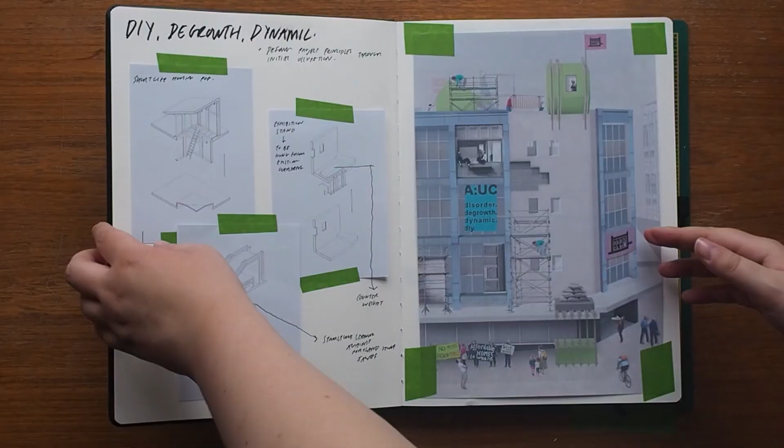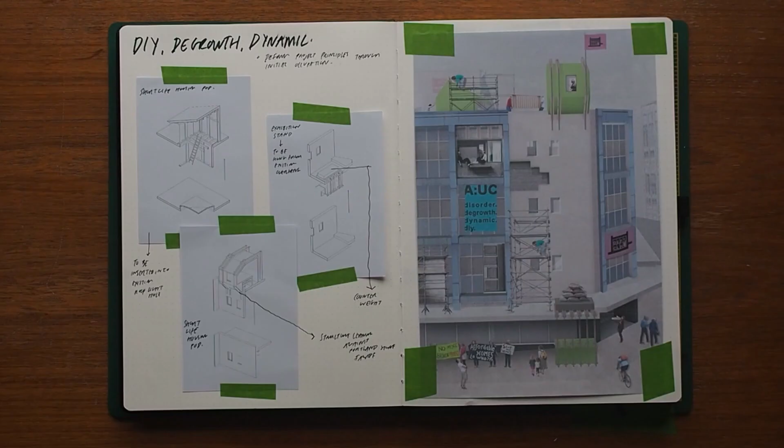The collective's approach is guided by three core principles: degrowth, developing an architectural language and spatial programme that changes systemic attitudes towards consumption; DIY, creating architecture that supports breaking, editing and altering, allowing for user-led customisation; and dynamic, designing spaces that are non-determinative and responsive to evolving user needs.

Evolving from early short-life housing projects, an alternative housing manifesto is proposed. The manifesto capitalises on the moratorium context by using abandoned construction sites as material stockpiles.

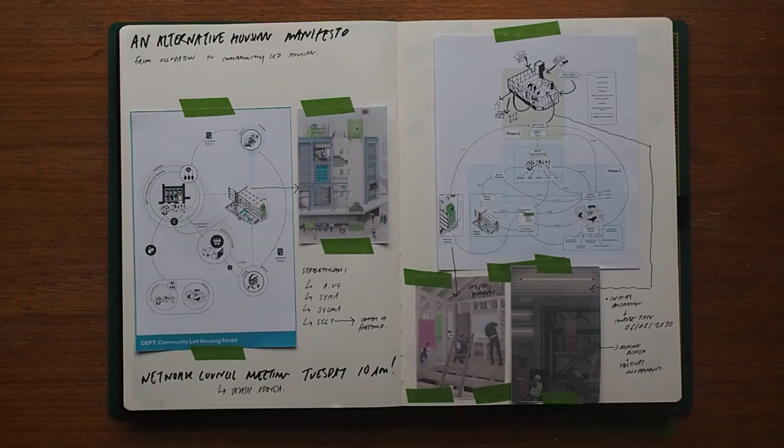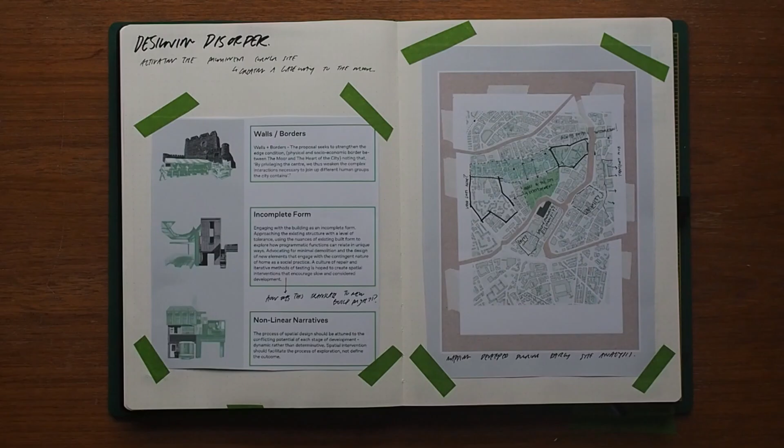Inspired by Richard Sennett's designing disorder and early site observations, the project adopts three key design principles. Most notably, incomplete form, where new developments are intentionally left unfinished. This fosters a culture of repair and iterative design, empowering residents to shape their own spaces, and non-linear narratives, where the design process is dynamic and exploratory, avoiding a fixed outcome from the start.

The architectural language of the project was defined by carrying out a waste walk through Attercliffe, an industrial suburb of northeast Sheffield slated for significant redevelopment over the next 20 years. From this walk, a material inventory was formed and used to develop a series of waste follies. These waste follies became a key architectural and material touchstone for the project.

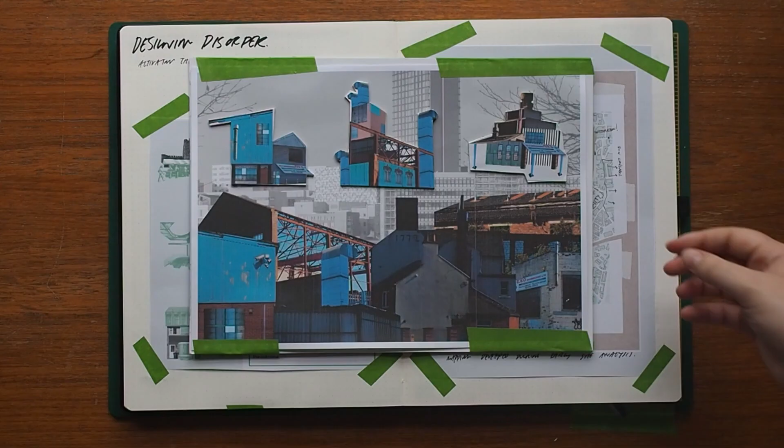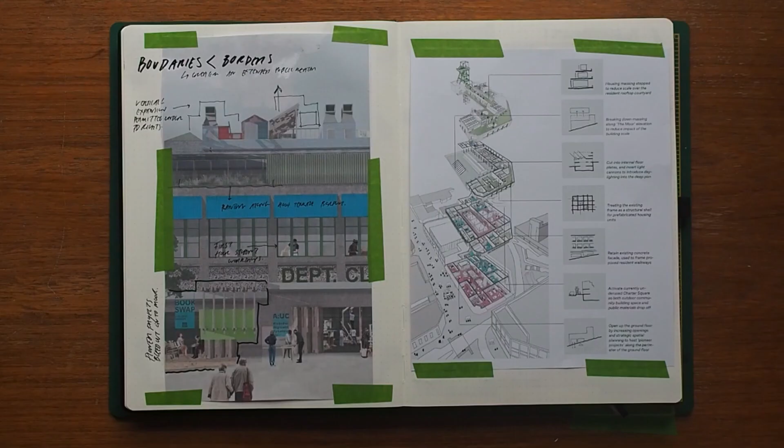Looking at the nuances of the architectural design, the layout emphasises vertical and horizontal adjacency of different programmatic uses to incite reciprocation between practices of home, making, education and community, with the perimeter of the ground and first floor plans being lined with human-scale urban mining-informed social practices such as repair workshops.

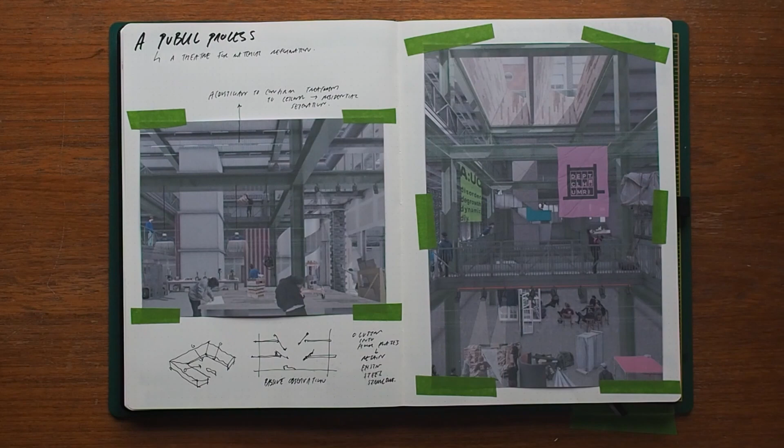The exposition space acts as a performative and education space, creating an extension of the public realm. It provides a tangible link between the city and the research happening inside of the building, inviting the public to engage with the nuances of material reclamation and reformation on a human scale.

Whilst the residential units act as a live testbed for the waste-first technical approach to be explored at scale, placing an emphasis on contingency in material stock and using adaptable structural elements to facilitate a necessity for design flexibility.

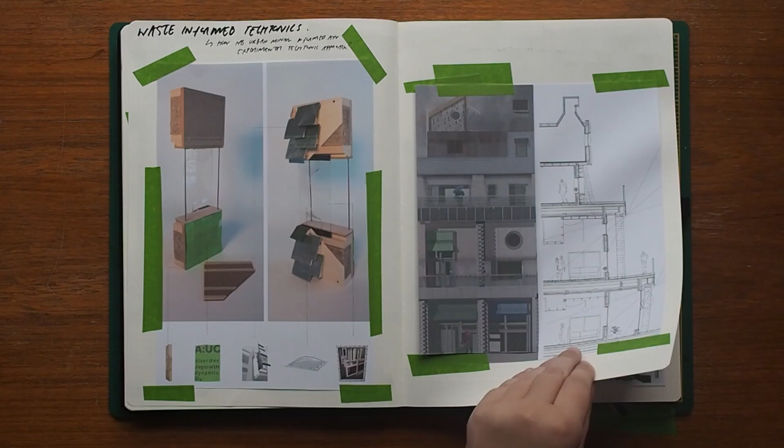Adopting a self-finishing approach to the design of the dwellings ensures the architecture is able to support different ways of living, adapt to modern practices of home, and establish new communities within this alternative housing methodology.

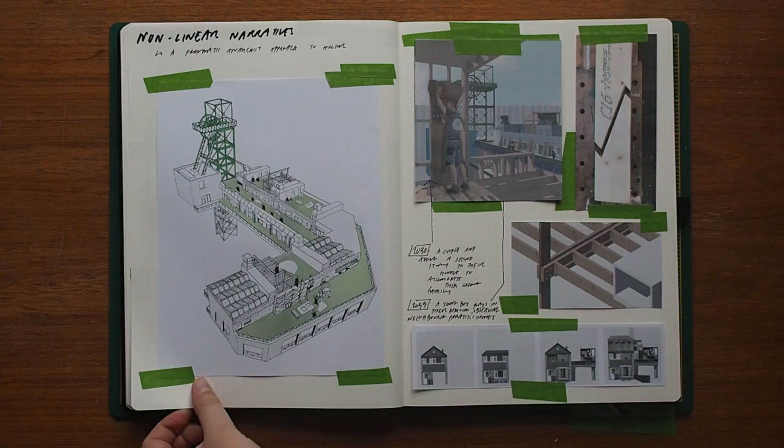Built on the original roof, the base model of the parasitic dwellings is constructed using structural sandbag walls, reclaimed timber, and salvaged aluminium from the existing building. This framework provides the most expensive and difficult to build parts of the home, giving residents the flexibility to complete the rest of the home at their own pace.

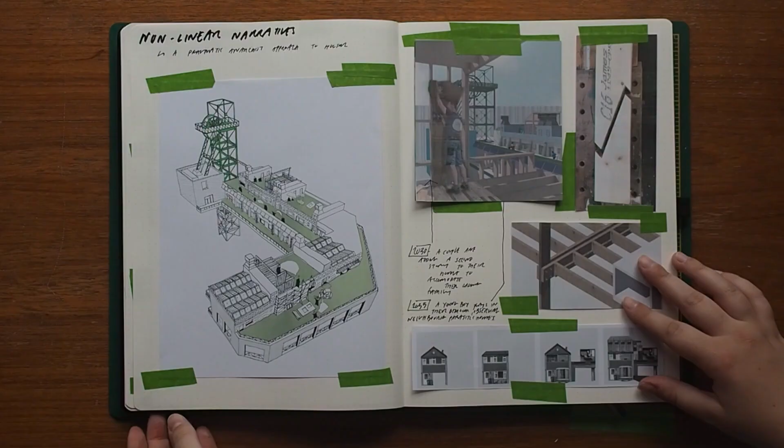By providing expandable housing, the project allows residents to maintain their socio-economic networks, establishing a more meaningful integration with the evolving city.